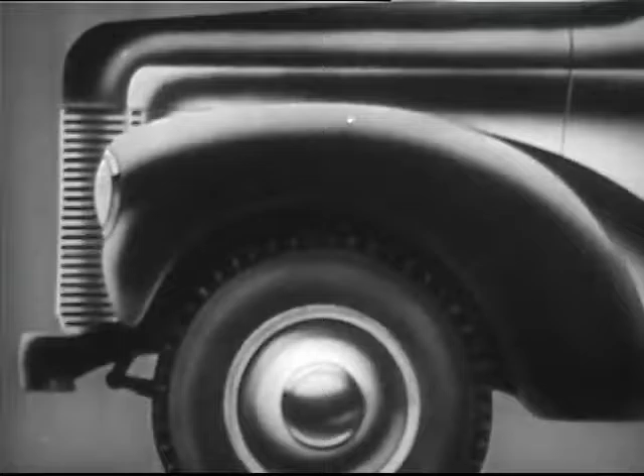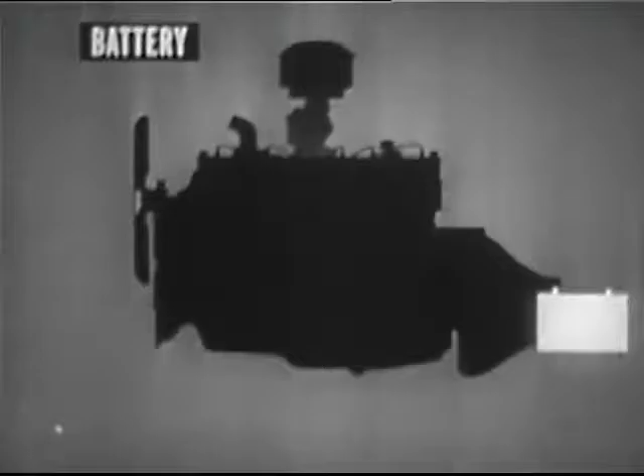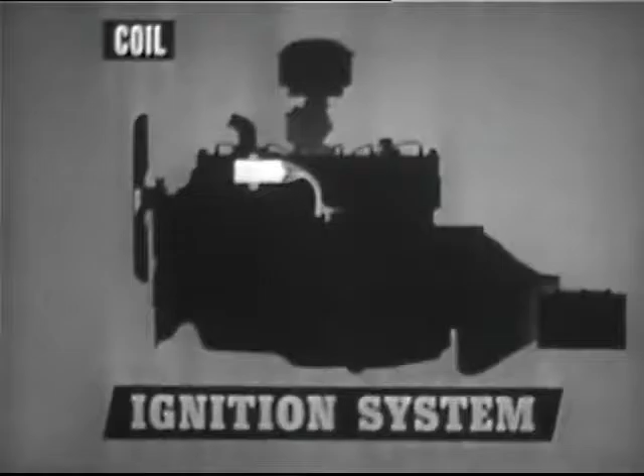Regular preventive inspection of the electrical system will help ensure its efficient and continuous operation. The source of electrical energy, the battery, must be maintained in proper condition to operate the starting motor, as well as the lighting system and electrical accessories, and the ignition system. Included in the ignition system are the coil, the distributor,

and spark plugs. The generator, with its output controlled by a voltage regulator, must keep the battery charged.

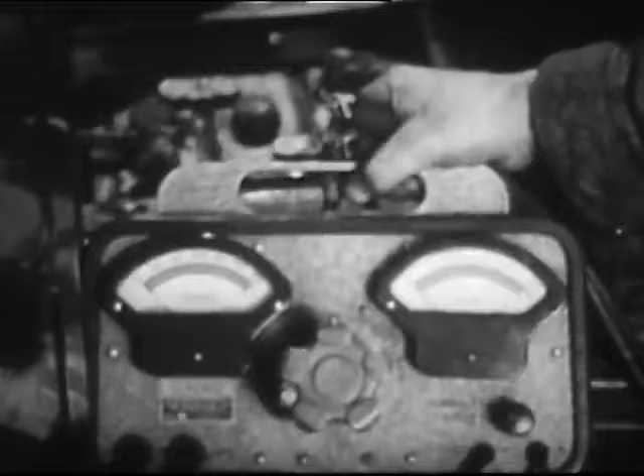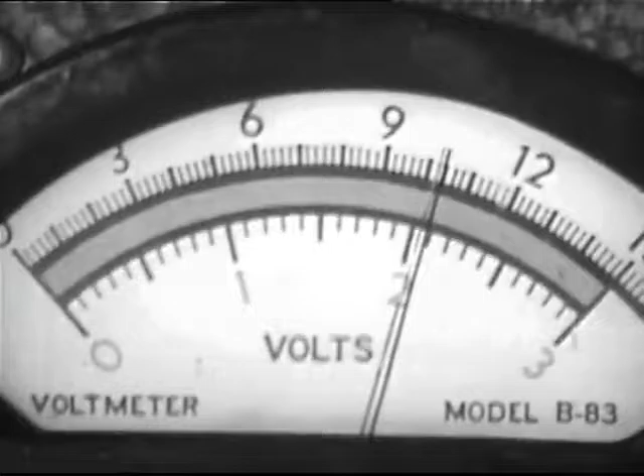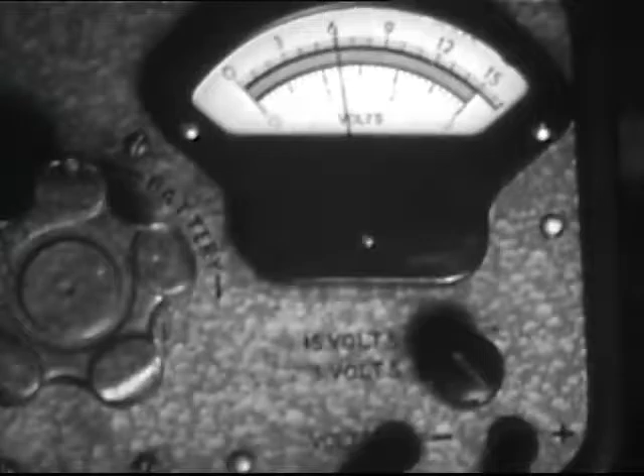Since the entire system depends on the battery, begin by checking each cell with a high-resistance sensitive voltmeter. Fully charged cells should register approximately 2.2 volts. Cells should not vary by more than 0.15 of a volt. Check the overall battery voltage. A 3-cell battery, fully charged, should test approximately 6.5 volts. Record the voltage readings on the inspection report.

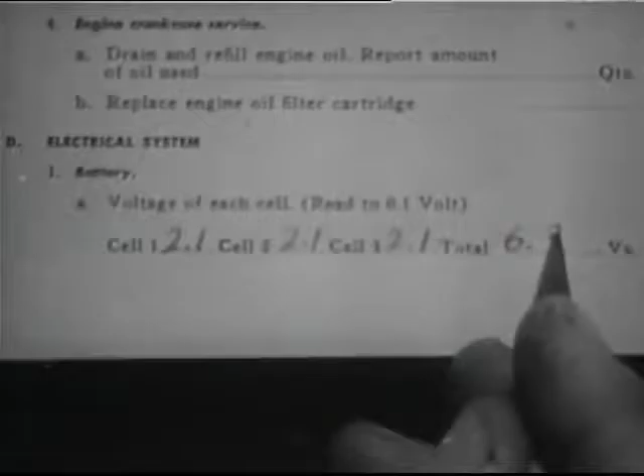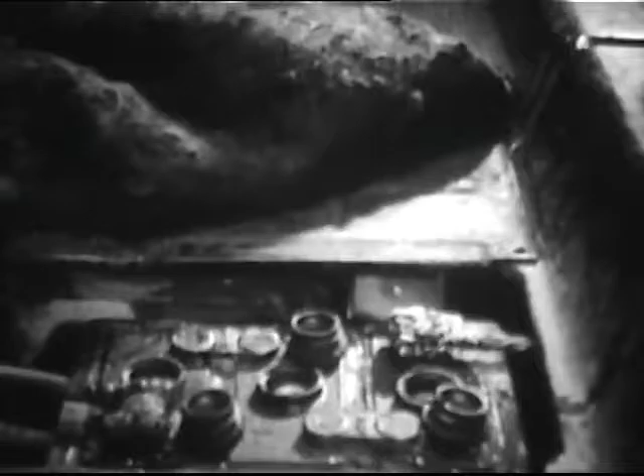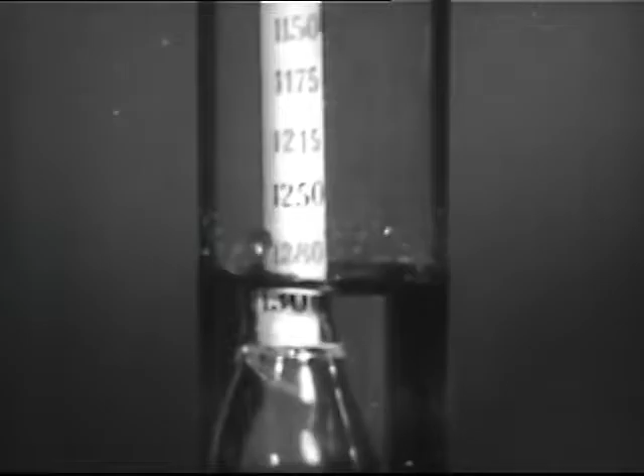Next, test the specific gravity of the electrolyte in each cell. Use a hydrometer equipped with thermometer and temperature correction scale. Fully charged cells should show a specific gravity of 1250 to 1280. Make allowance for battery temperature using the hydrometer correction scale. If the reading is low, 1220 for example, the cell is being undercharged about 50%.

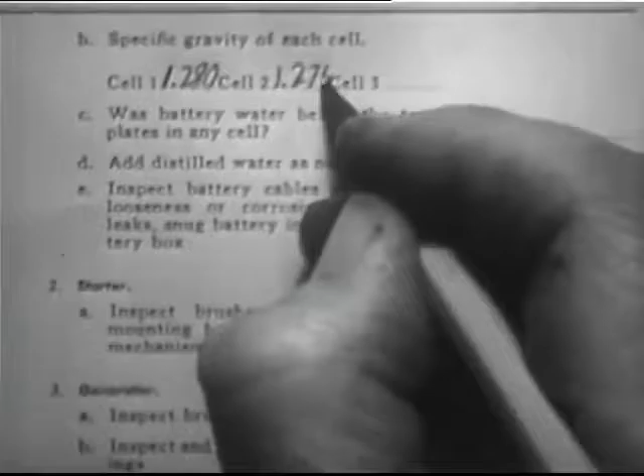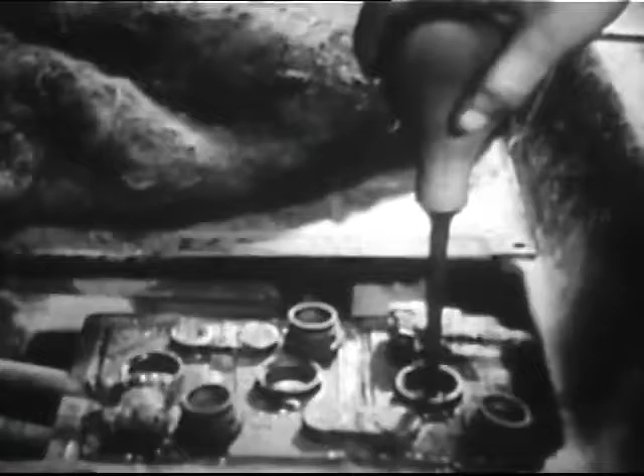Record the hydrometer readings on the report. Check the liquid level of each cell and add distilled water if necessary. To avoid overfilling, use a self-leveling syringe. Rest the tip on top of the plates and force the water in. Any excess is automatically drawn back into the syringe.

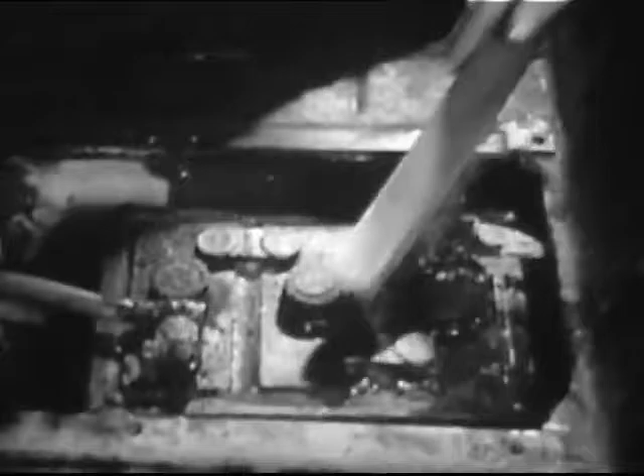Check cables and terminals for tightness. Remove corrosion with a stiff brush. Wash the battery with a weak solution of soda and apply anti-corrosion compound to the terminals.

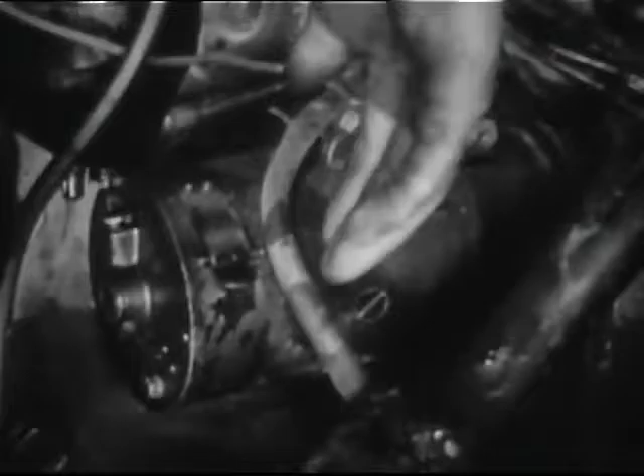To inspect the starting motor, first remove the cover band. Check the length of the brushes. Those worn to less than half their original length should be replaced. Examine the commutator for high mica, flat spots, or pits.

When using the screwdriver, be extremely careful to insert the blade only at the metal risers. Do not touch the commutator or the wiring. If the commutator is dirty, switch on the starter and clean it with a piece of double-aught sandpaper wrapped around a stick. Never use emery cloth.

Check bushings of the starter housing for radial play. These show no appreciable play.

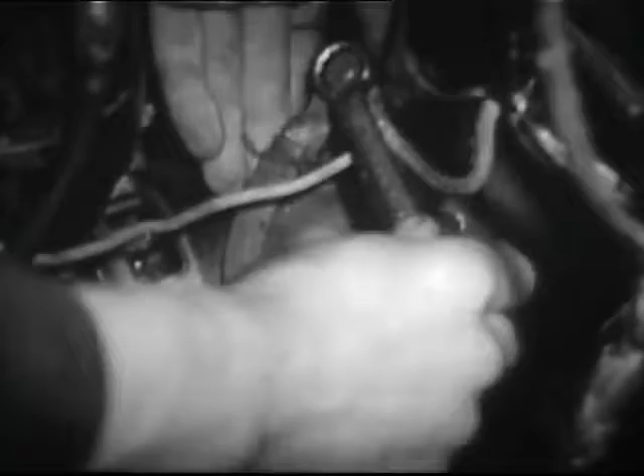Before testing the starting switch, disconnect the ground strap from the battery to prevent short circuit. Remove the switch and carefully inspect the terminals. Switches with damaged terminals should be replaced. See that all connections are tight. Note the condition of the starting motor and switch on the report form.

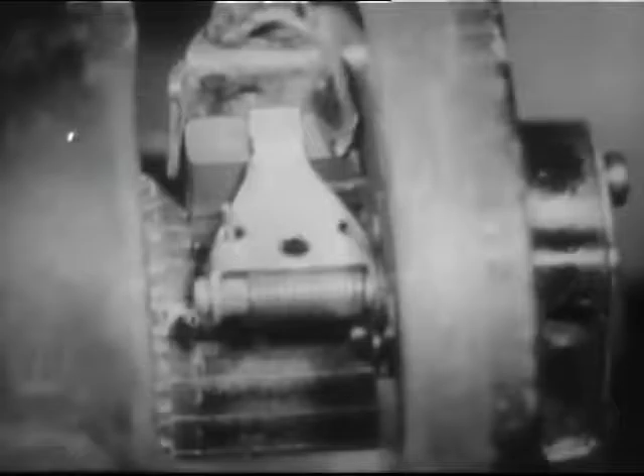Inspection of the generator is generally similar to that of the starting motor. Check the brushes. This one, less than half its original length, should be replaced. To replace brushes, the generator should be removed and work done at the bench. To properly seat new brushes, hold a seating stone against the turning commutator. Particles of stone are spread beneath the brushes, seating them very quickly.

Inspect the commutator for flat spots. If it has thrown solder, the armature is overheating and must be repaired or replaced. Otherwise, clean the commutator with double-aught sandpaper. Never use emery cloth. Springs with improper tension cause excess wear and should be replaced.

Now, unhook the fan belt from the generator pulley and check the armature shaft for play or roughness. As a further test, run the engine and check for unusual vibration which might indicate roughness in the armature shaft bearings.

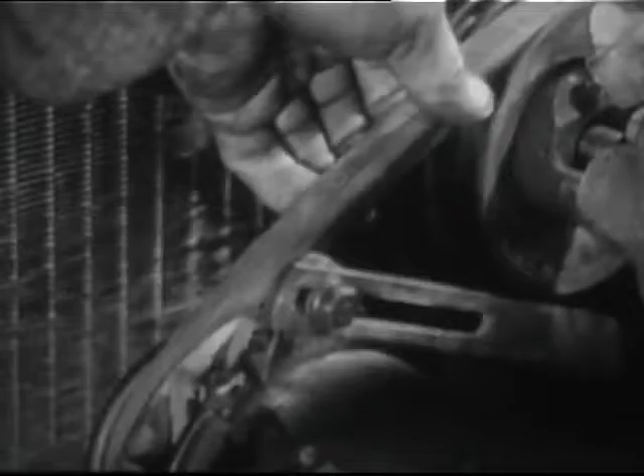Check the fan belt for wear and for proper tension. About 1/2 inch of deflection is correct. Be sure mounting bolts are tight. Check tightness of the terminals.

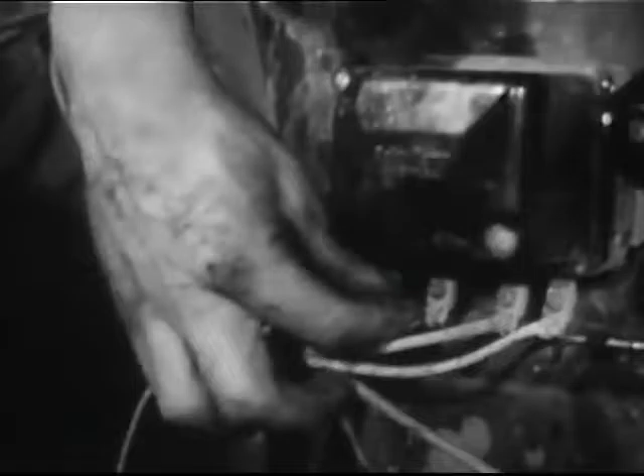Now make a quick check of low-tension wiring around the engine, particularly between generator and voltage regulator. Look carefully for worn insulation, loose or broken wires, and loose connections. Check the spots where wires may chafe against metal parts.

Check the lighting circuit. With the headlight shining on a wall or panel, operate the floorboard control switch to see that both lower and upper beams are responding correctly. While lights are on, check the ammeter. Tap the glass lightly if the indicator is sluggish.

To check adjustment of sealed beam headlights, turn on the high beam. The center of the zone of highest intensity should fall on intersecting lines fixed according to manufacturer's specifications. No extra adjustment is needed for low or traffic beam.

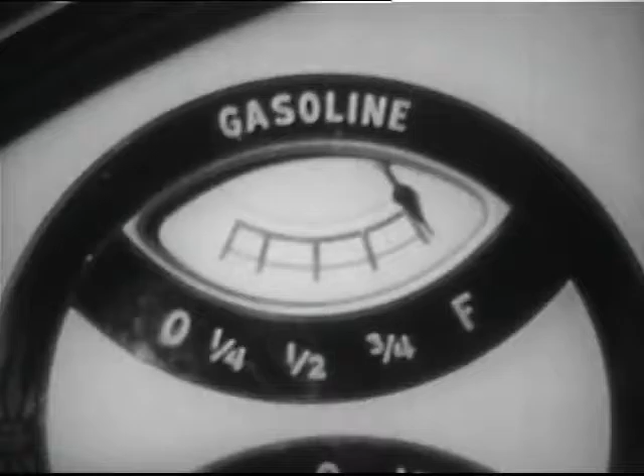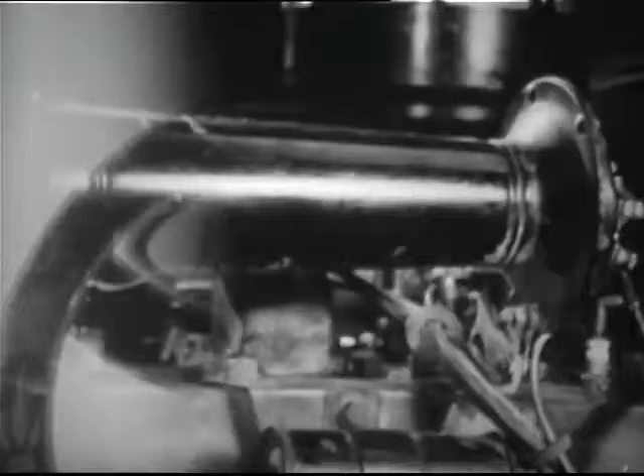With the light switch off, check action of the stoplights. Each stoplight should cause a discharge of about 1 ampere. Turn on the ignition switch and make sure the gas gauge is working. To check the temperature gauge, warm up the engine for about 10 minutes. The indicator should show normal operating temperature. Be sure the horn operates properly and that mountings are tight.

Report the checks made for generator, wiring, and electrical instruments. You are now ready to conduct a series of tests on the voltage regulator. To test the cutout, disconnect the battery lead wire, and since it carries live current, wrap the end with tape.

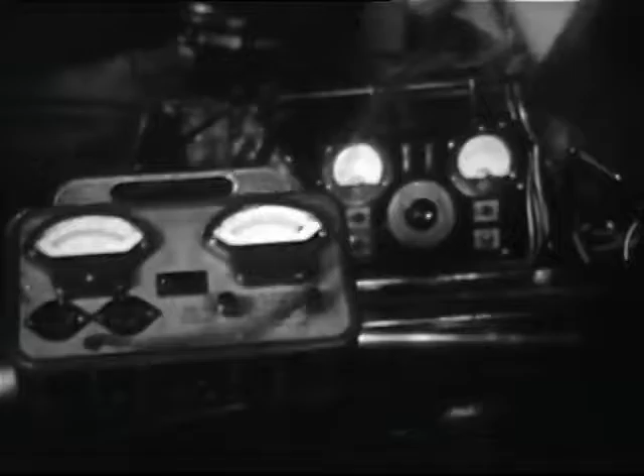Next, hook up a voltmeter between the regulator terminal and hold-down screw. At the same time, connect a tachometer to the engine. Run the engine at idle speed. If the generator cutout is open, as it should be, the voltmeter will indicate 0.

Now increase the engine speed until the reading is positive. This indicates the cutout has closed. Record this reading. Also record the speed at which the cutout first closed.

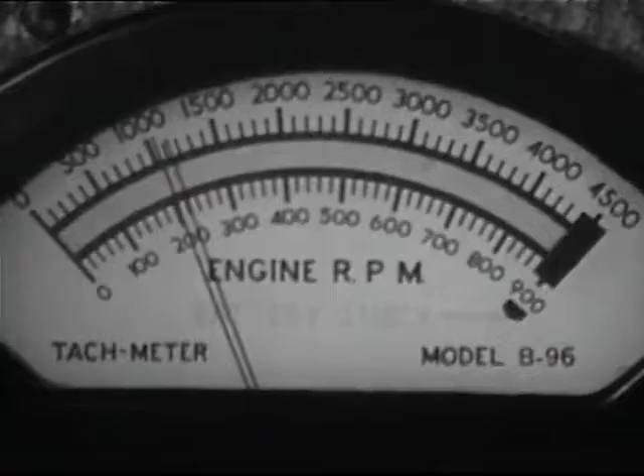Now to test the voltage regulator, increase the speed to 1,000 RPM and note the voltage. Compare this with the manufacturer's specification.

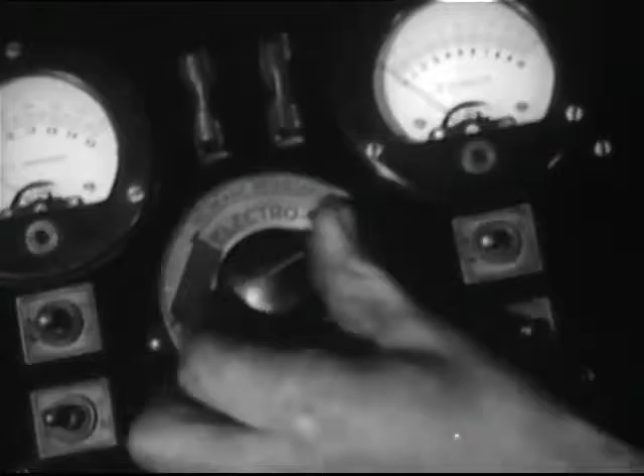To test the current regulator, hook up an ammeter to the regulator. The battery is still disconnected. Add resistance to simulate a partially discharged battery. Run the engine at 1,000 RPM and observe the charging rate.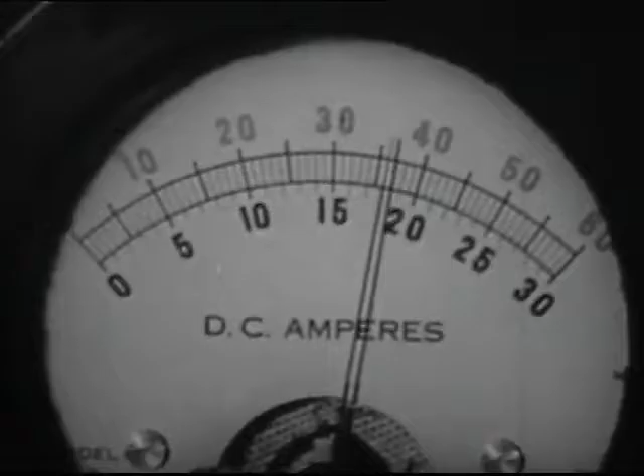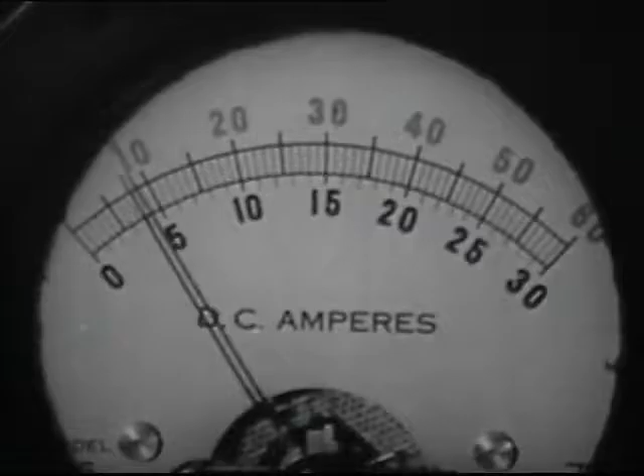Now eliminate the resistance and connect the ammeter lead to the battery wire. Again, run the engine at 1,000 RPM and observe the charging rate. Compare this with the dashboard ammeter. Both should register approximately the same.

To check the general condition of the wiring, battery, and starter, restore the battery lead and connect a voltmeter across the regulator. Take a reading with both the starter and ignition off.

Now, connect the voltmeter across the starter post and starter base, and with the starter off, observe the voltage. Next, run the starter half a minute with the ignition off, and again observe the reading.

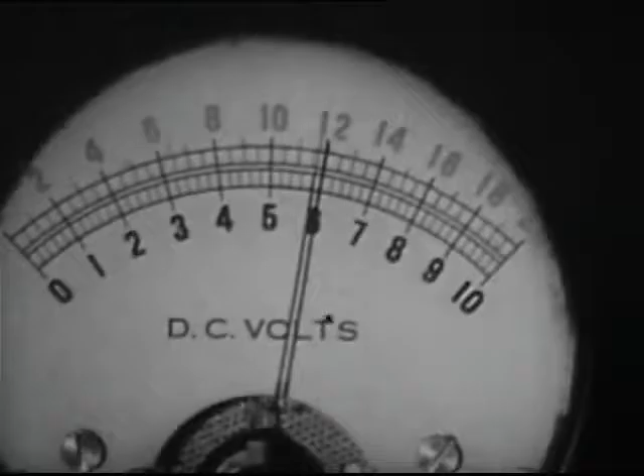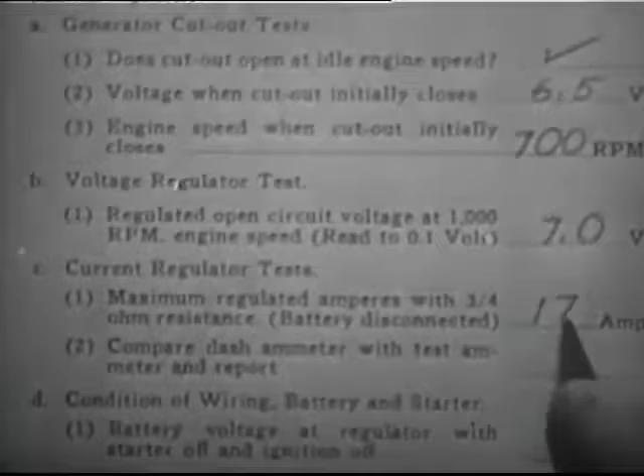Report all readings and compare with the manufacturer's specifications. Excessive voltage drop may indicate poor battery condition, defective cables, or connections.

Another important step in preventive maintenance is the checking and testing of the ignition system, which must be in the right order to fire the fuel mixture at the correct time.

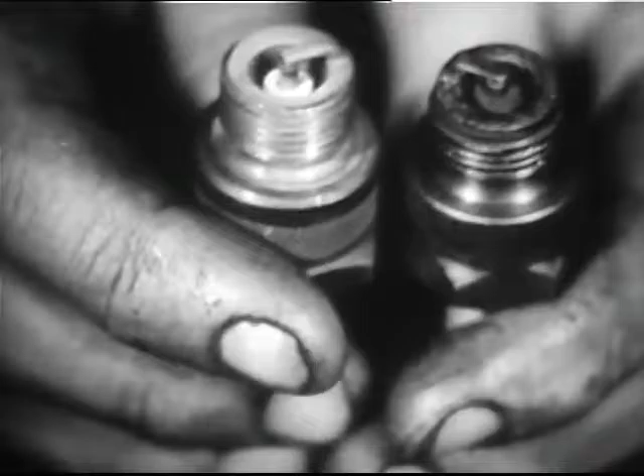Begin your inspection with the spark plugs. Be careful not to break the porcelain insulators. For efficient operation, plugs must be free of carbon and oxide deposits. Clean dirty plugs with a blast-type cleaning machine.

If the plug is properly cleaned, the lower end of the insulator will appear white. Measure electrode gaps with a round feeler gauge. Make adjustments by bending the outer electrode, never the center one. In replacing, provide each plug with a new gasket.

Inspect high-tension cables for corroded terminals and cracked insulation. Check for corrosion at the distributor cap sockets.

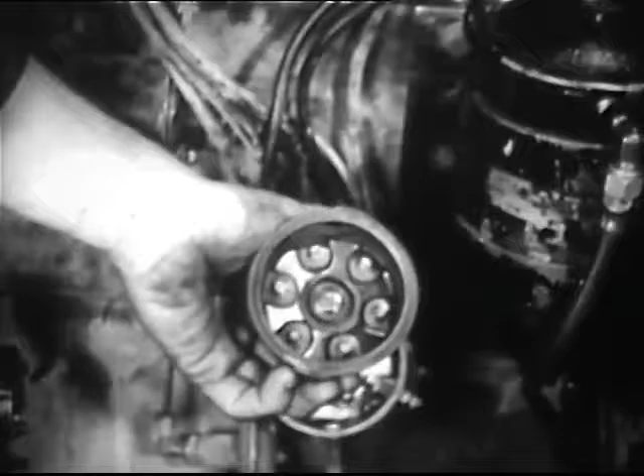Inspect the distributor cap for cracks. A magnifying glass is often helpful. Minute cracks, often caused by moisture, may result in high-tension leakage. Check the rotor to see that it fits snugly and is not worn.

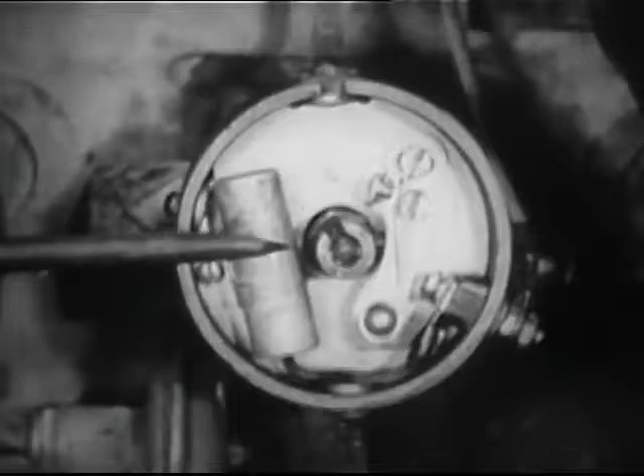To check the automatic advance mechanism, turn the breaker cam in its normal direction. It should move freely and return when released.

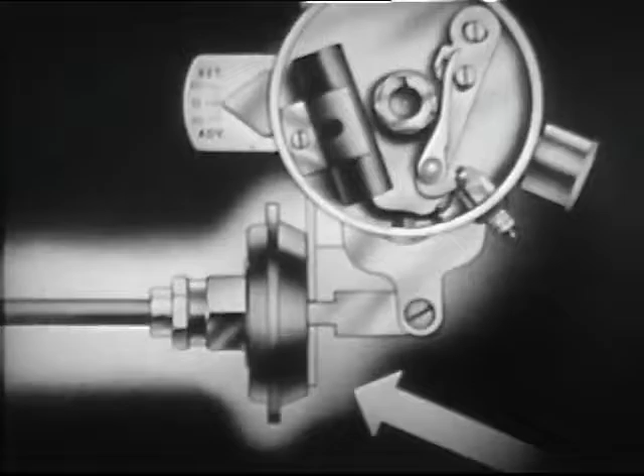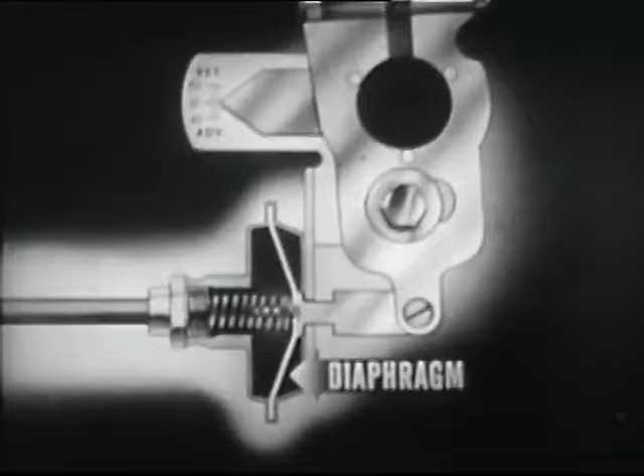Check the freedom of action of the vacuum advance mechanism. This mechanism, known as the vacuum unit, works off the vacuum line. Its principal parts are a diaphragm and spring. When the unit is advanced by hand, it will return easily if the spring is in good condition.

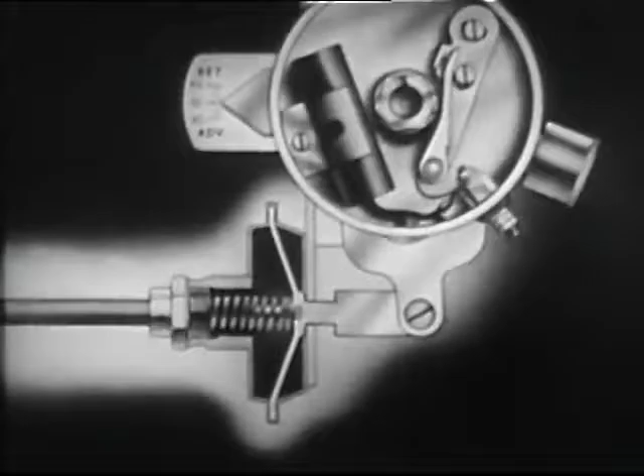Place a small dab of Vaseline on the cam. Use care. Too much will damage the contact points. Apply a drop of light engine oil to the breaker point arm post and the rotor wick.

Inspect the breaker points. These are in good condition. Burned, badly worn points should be replaced.

To test the breaker point contact resistance, connect a voltmeter to the distributor. Turn the engine until the points are closed. Turn on the ignition and read the voltage. Any noticeable reading indicates high point resistance. In this case, none is indicated.

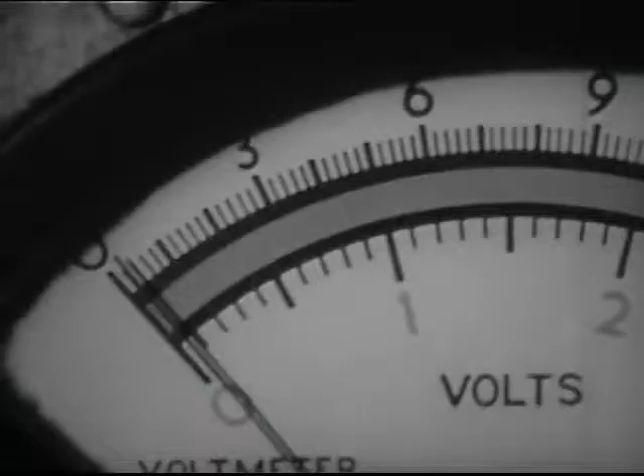To check the ampere draw of the coil, disconnect the primary coil lead at the distributor. Connect an ammeter between the coil and ground. Turn on the ignition and observe the meter. The coil should draw about 4 amperes. Enter pertinent data in the report.

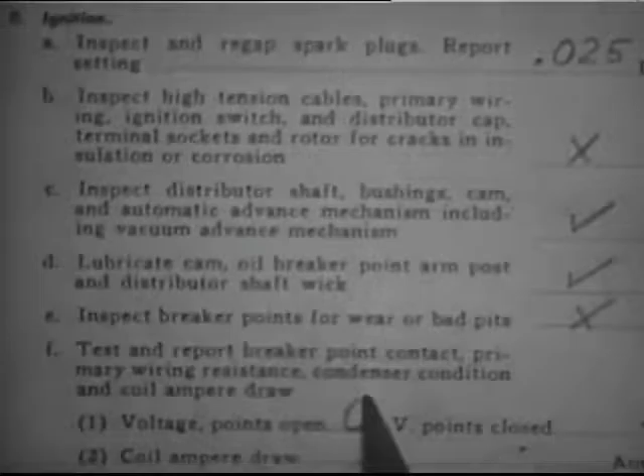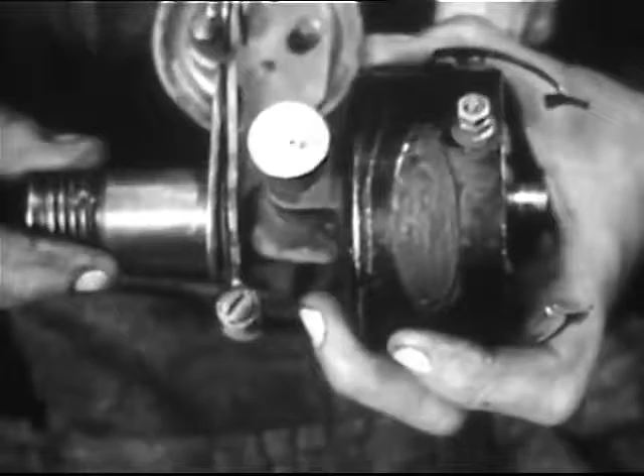It's advisable to remove the distributor occasionally and check for end play in the bushings. One approved method of setting breaker point openings is with the cam dwell meter or synchroscope.

The meter indicates in degrees the cam angle at which the points are closed. Adjust the points until the reading corresponds with manufacturer's specifications.

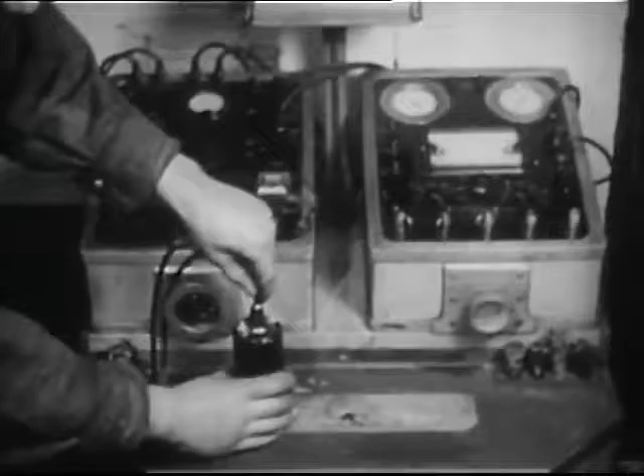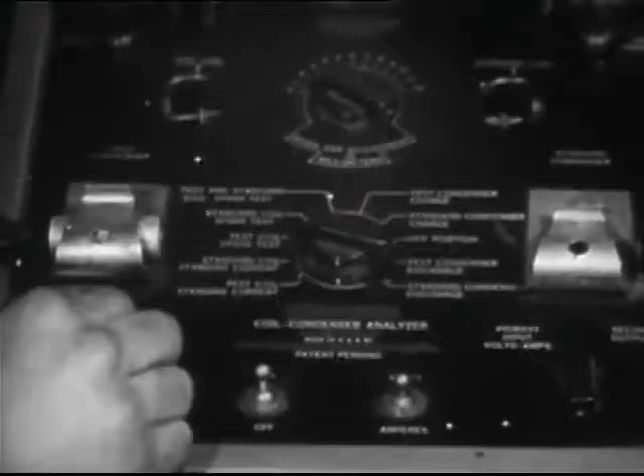Condition and capacity of the ignition coil may be tested with an adjustable gap meter. The coil should always be tested at normal operating temperature. A spark of the correct length indicates that the coil is in good condition.

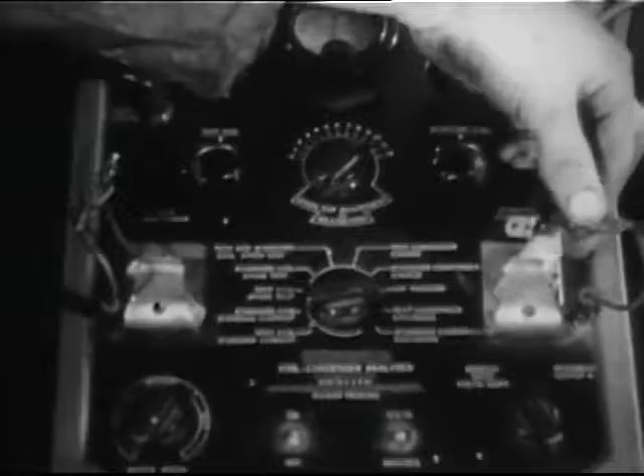A test meter is often used to check the condenser. In this case, the intermittent flash of neon reveals a leaky condenser.

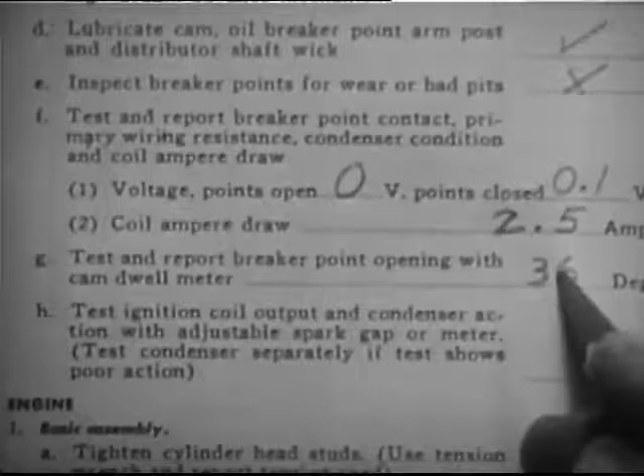Make your reports complete and comprehensive. Remember that careful maintenance of the electrical system is necessary to the efficiency of any vehicle.